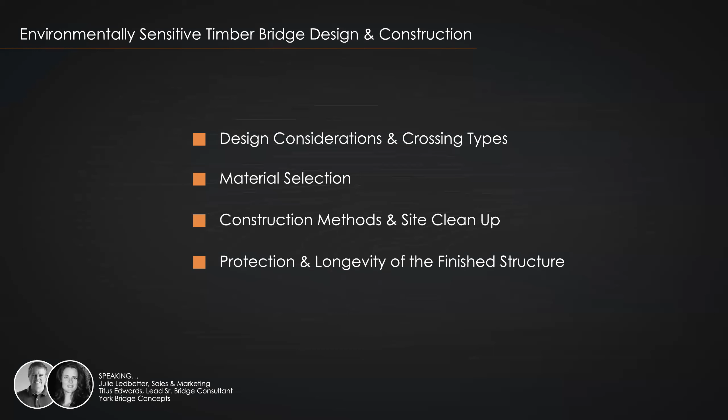Bad for the environment. Julie, these are 4 great points, and they will serve as an outline for our presentation today. And we're going to discuss how York Bridge is involved in all aspects of this from an environmentally friendly solution with our timber bridges.

Yeah, that's a great point, Titus. And of course, it all starts with choosing a span. Choosing a span is going to be, of course, number one, based on cost. You did a webinar already on spanning solutions, so that tends to be the number one concern. But then you have those special projects where a span needs to be considered based on the environmental concerns of the environment. Is that right?

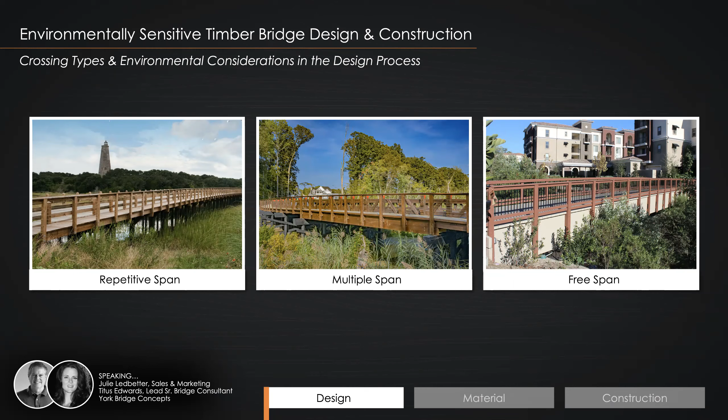Bald Head Island is a great project, Julie, and you can see on the right from the aerial that there is a wetland, a marsh area within the island. This is a small private island about 2 miles off the coast of North Carolina, just south of Wilmington, and it's a resort tourist residential type of place.

People take a ferry across, and you can see the marina where they come in. Once they're there, they don't really have cars, but there's a tram that'll take you to various spots around the island, and you can also rent golf carts. But they wanted a little better connectivity, so they called us to build them a bridge over their wetland area. Now you can see the bridge on the left, and what a beautiful bridge it is.

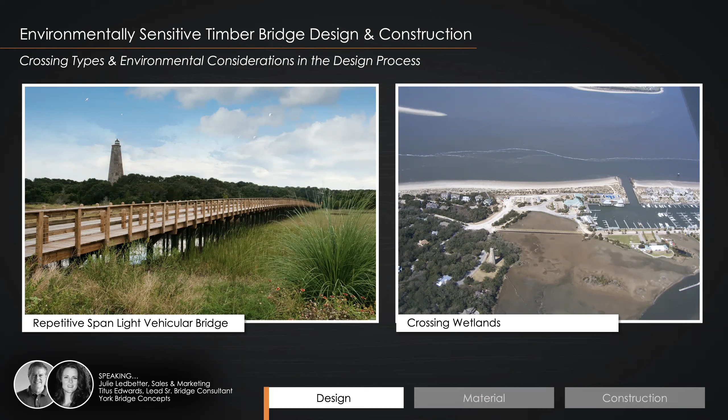Our second spanning design consideration when it comes to being environmentally friendly is our multiple span design, and our feature project here is Coastal Club. This is in Lewes, Delaware, and it's a subdivision that surrounds a 42-acre nature preserve. It's near the Atlantic Ocean, and it had 2 large areas of land that could be developed, but it was split by that 200-foot sensitive area.

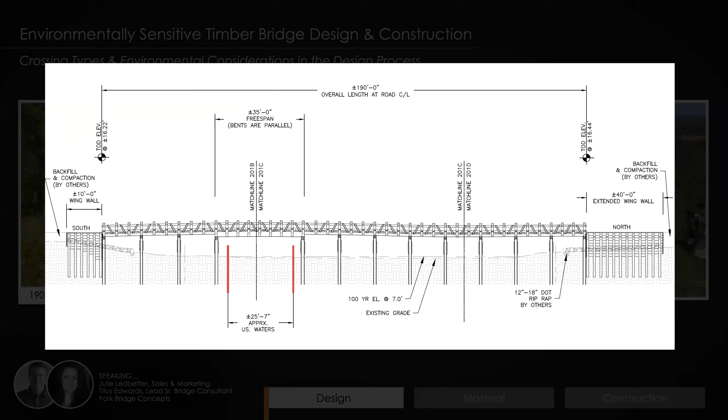There you see the waters, the main water channel there to the left, the red lines. You see the pile supported approaches coming and going on both sides. This is a great design, often used for many reasons, but it's very environmentally friendly to avoid any supports in the main water channel, and yet enables us to build a longer bridge.

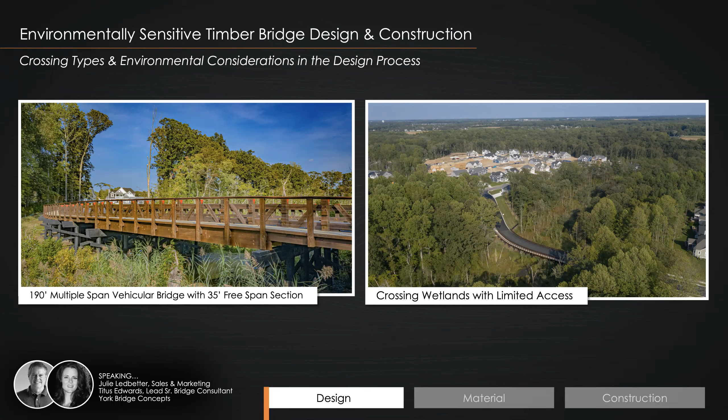So the bottom line is if you are working on certain crossing challenges and you know that you've got to meet permitting, or you have a special concept or design, or you really want to uphold certain principles in your projects, the custom design and on-site build that York Bridge can provide, we can accommodate those needs. And I think Coastal Club is a great example of that. We'll hear more about Coastal Club a little bit later, but let's move on to a free span design.

I think most of you are familiar with a free span design. Usually our clients, when they come to us, they say, I just need to span over this. So they're thinking one continuous span. This is Adagio on the Green, in Mission Viejo, California, a lovely little pedestrian bridge that crosses over the Oso Creek.

The issues with the Oso Creek with the local permitting agencies is they experienced a lot of pollution through the creek, and they were cleaning up the creek. So they made their local jurisdictions more difficult to add to. You couldn't add piling at all into the creek.

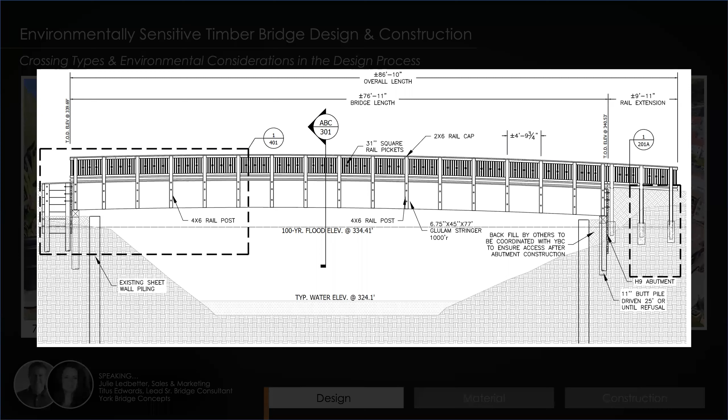Here's the drawing. I think we wanted to look and see, there's a 100-year flood elevation. We can see that the free span completely clears that flood elevation, and the Oso Creek flows underneath it. Very good. It's a beautiful pedestrian bridge. They love it out there, and it fits so well into that environment.

So I think, like I said at the very beginning, when we talk about being environmentally friendly, Timber Bridge Company, people naturally assume that we're just talking about the materials. Well, we are going to talk about the materials. The points we want to make about it is that, yes, it's a naturally and environmentally green material. It grows naturally, it's durable, it's sustainable, it's renewable. And if you have a special project where you need special FSC certified or LEED certification on your material, we can source that. That is an option. Like I said, that's an advantage to going with a custom design and build on site company.

You know, timber is very environmentally friendly. It is a green material. It is natural, it is organic. And most of the lumber that we're using is coming from tree farms that are being produced for the timber industry. And so it works out very, very well. It's a renewable, sustainable resource, much more environmentally friendly, with a much lower carbon footprint than the production of concrete and steel today. So timber works very, very well. It's a great material to build bridges out of.

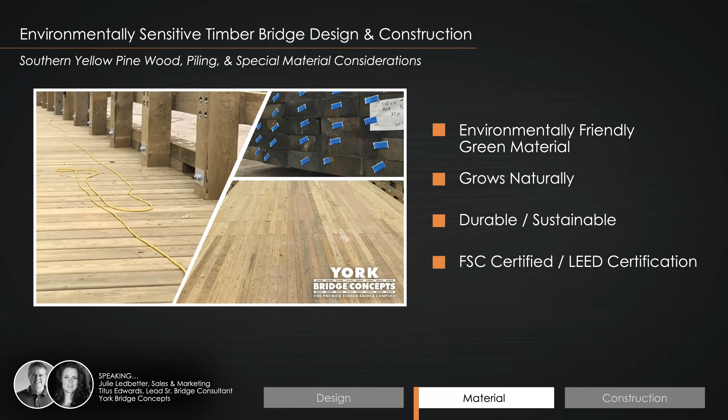If you just want to look and see the impact of concrete and steel, Google those two terms and put the word environment next to it and see what kind of articles you come up with. They're not good. Whole different animal, isn't it? Whole different animal. And we'd love to see a lot more timber wood construction in the future. It's a very big trend. Even outside of bridges, you see a lot more information about mass timber and the use of it in building buildings even.

So yeah, the main material we like to use is southern yellow pine. This is a picture of southern yellow pine going into the treatment.

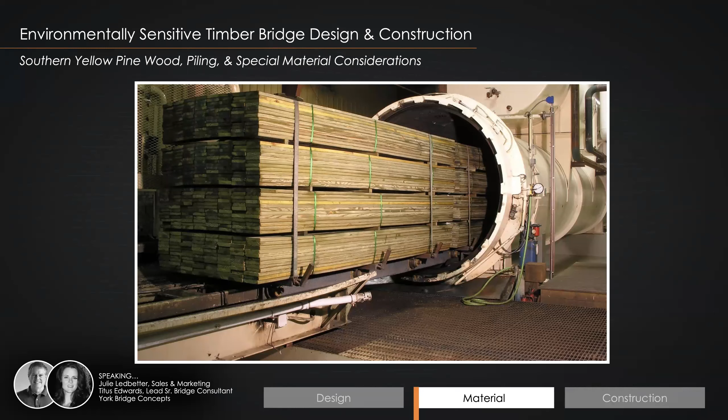If you take wood and put it outdoors, it's only going to last a limited amount of time. So you pressure treat lumber, and that's what you're seeing here. They're putting the raw lumber into these vacuum tubes and put preservatives into the wood. The idea is to prevent the wood from rotting outdoors and prevent bugs and termites from eating it. Pressure treatment is very important, and all of the lumber we utilize is pressure treated, except in a few cases, which we'll share with you in just a moment.

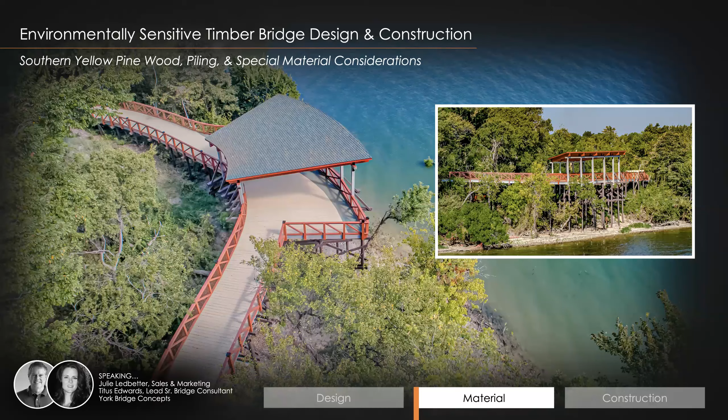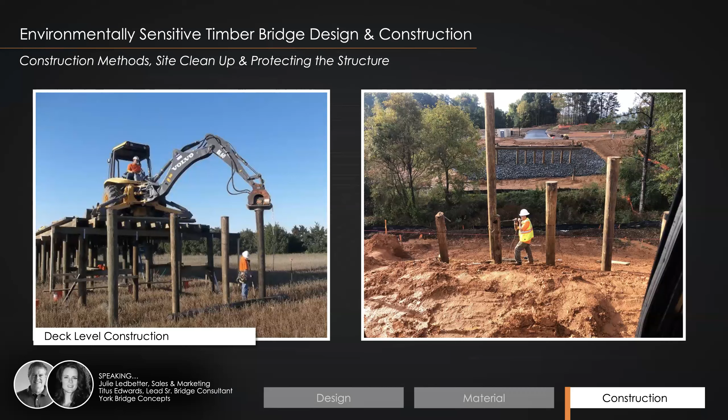Again, working with our excavator, with that vibratory hammer. And there's a stream that's being delineated by that silt fencing, and that's the protected area. And we're going to show you in just a moment, not only the materials, the design, but also the construction method, and very environmentally friendly. As a matter of fact, here it is.

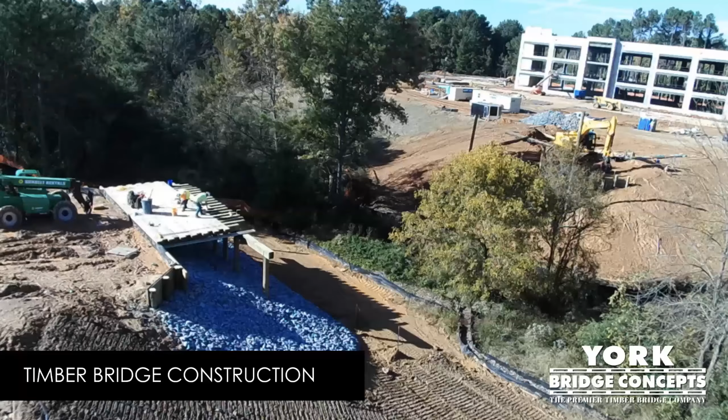And here is Edison Chastain in motion. Edison Chastain is an office building that's built in Marietta, Georgia. You can see it there on the right. And this is the entrance road coming up to the office building. We built a 2-lane vehicular bridge. It's 130 feet long, and it is a multiple span design. It has 3 15-foot approach spans.

You see them there on the left. On each side, there's some more on the right. But in the middle, there's a 40-foot long free span. And now you see them setting the glulam beams for that 40-foot free span. And I noticed, Titus, I did notice that nothing happened in the crossing. Everything went over the crossing with no problem.

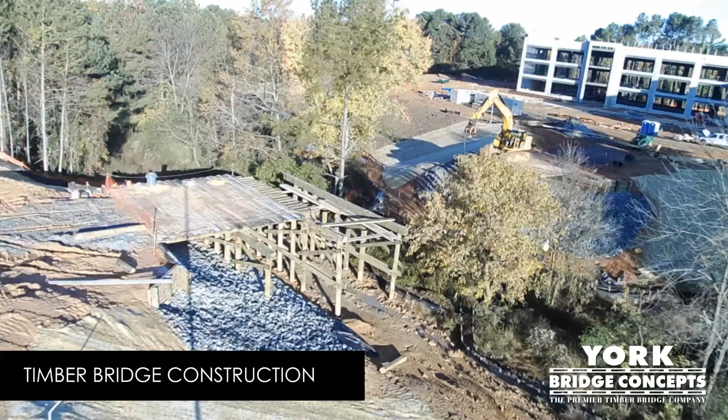Ta-da! Environmentally friendly construction method. We built from one side, working from the deck, went around, built from the other side, and then set those 40-foot glulam free spans, and we just spanned over the stream in the environmentally sensitive area. Deck level construction, design, the right materials, all of it went into play in this one bridge. And then look what you finish with.

Beautiful. What a gorgeous bridge, matches the aesthetics of the building. And we were honored to work with the developer on this project. And what a beautiful legacy design timber bridge, built in a very environmentally friendly way.

Yep. And as we get to the end of the presentation, we're going to talk more about protecting the structure. You can see here that we do have our acrylic polymer coating. And you can see that the timber piles themselves are coated, and that is to extend the life of the piling and the substructure so that that bridge will be in the ground for a very long time. And it provides an enhanced aesthetic as well, doesn't it?

Absolutely. So site cleanup, when we are on site, we do consider the environment. And we know that if you've ever been to a construction site, especially around here in the Wesley Chapel, Tampa Bay area, there's tons of construction everywhere. And sometimes from the road, I can drive and see that there's sometimes trash everywhere. There's sometimes shavings and all types of scrap materials laying around.

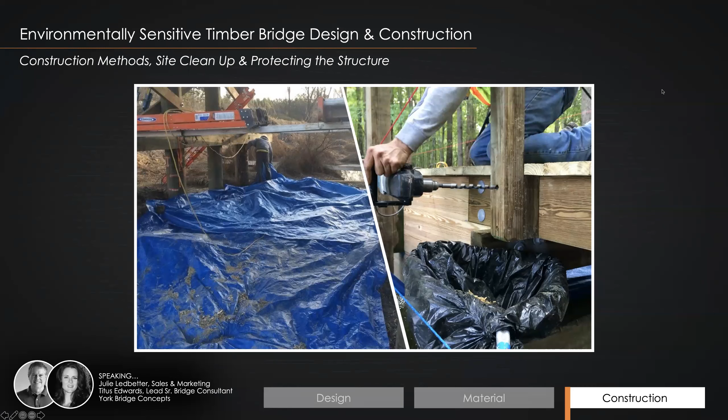It is amazing. And considering all of the shavings that go everywhere, the fact that we're able to catch them and dispose of them properly, and keeping that environment as clean as possible is quite amazing. It just shows the extents that York Bridge goes to. I don't know, there's other companies that do this type of thing, certainly not to the level that we do it. And this is why York Bridge is so special and so unique in so many ways. And this is just a couple of small things that we do to protect the environment, but that makes York Bridge so special all the way along.

Yes, when we do have to drill because of hard soil situations, we're also conscious of the spoils that are coming from that augering methodology. And you see here how we're actually capturing those into one of these large commercial garbage bags.

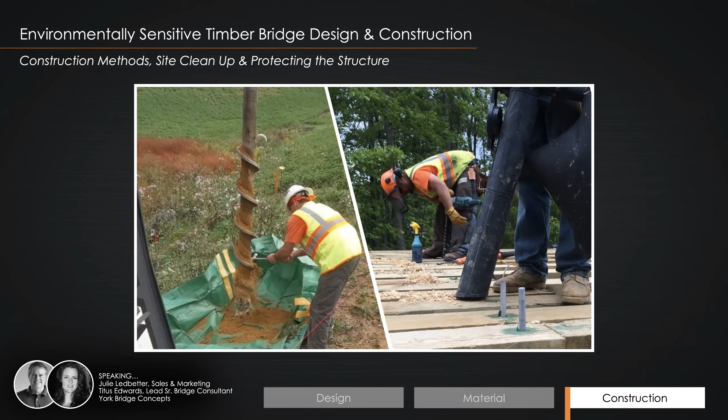Again, what a special and unique thing, because we don't want this sawdust and these cuttings to just go all into the environment. Again, many methods that we're utilizing to protect the environment: the design, the materials, the construction methodology, and some of the special things we do in building bridges.

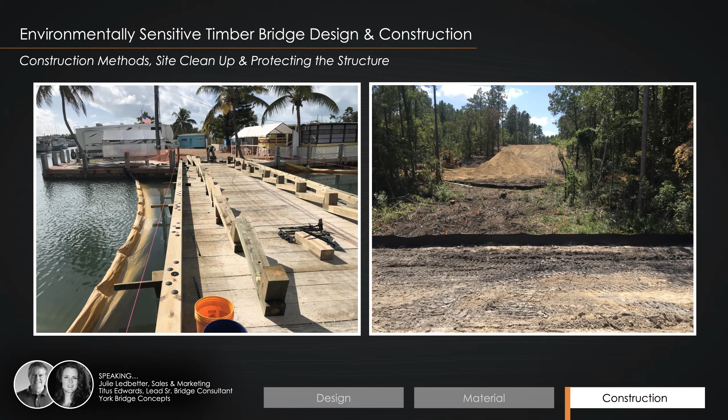Yeah, and then also the other consideration when we're on site, of course, it's standard to put up the silt fencing, but we just want to remind our audience that with timber bridge crossing, it is required. So we do put up the silt fencing, and we also use the turbidity floats when we do a water build. Turbidity curtains on the left there catch any of the debris and spoils that may get into the water, and then they can be cleaned up. And then, of course, silt fencing on the right from a ground standpoint. But in both scenarios, again, the environment is being protected in a permitting friendly way as well.

So back to Coastal Club. So we had a special situation at Coastal Club. Obviously, we talked about the multiple span. That is what we were spanning, that nice little section there. You can see the lovely pond underneath, the wetlands there. They went untouched. We did not put any materials into that area. But the situation was that we were unable to deliver materials to the other side of the bridge in order to start the repetitive span deck level construction. So what did our crew do, Titus?

Well, this is really special and unique, and it just goes to show again the tremendous talent. When you've got a company that has built so many bridges like we have, experts in the field know exactly how to accomplish any type of construction, no matter what the limitations may be. You know, Julie, I've had clients that call me and say, well, I got to get a helicopter and get materials in there because there's no access. Well, here's a perfect example of the creativity of York Bridge. And if we can replay this little video again, I want you to see what we're doing here.

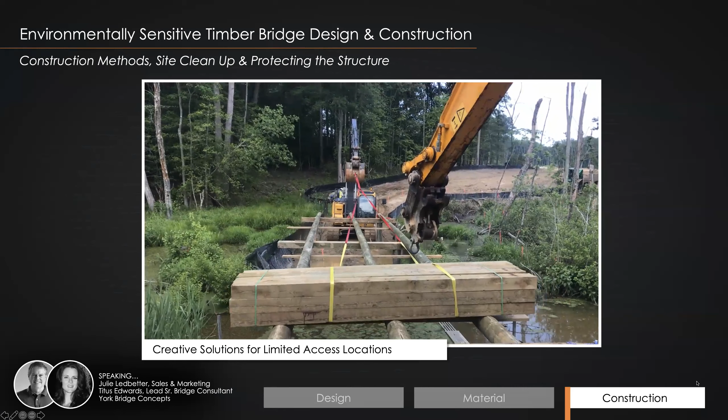Now, if you remember this Coastal Club Bridge, it's a multiple span. So there's a stream in there, and you've got a 35-foot free span. Well, we can't reach and build it all from the deck from one direction, but the access to the other side was very, very limited. So what do we do? We got two excavators, one on each side, and they have built this temporary crossing. You can see the piling. These are big 65-foot long piling, and they're taking the lumber and pulling it, sliding it across.

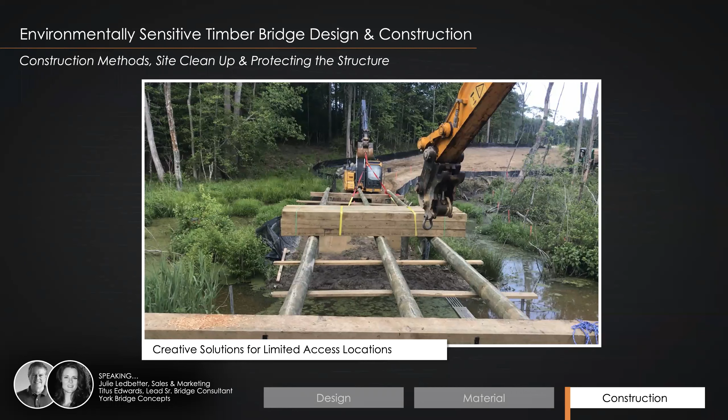You know, Julie, I have read some things about the Egyptians building the pyramids, and they may have used some similar type of technology in sliding some of those big stones. But again, you see the creativity that we're able to utilize. Sure. When you don't have trucks and you don't have the technology of today, I'm sure you had to get really creative back then. Yes, indeed. And we were able to complete this entire bridge in a very environmentally friendly way without destroying or messing up or impacting that wetland or stream.

Yep. So let's transition into a project review. We have a special project to show you. It is a single lane vehicular driveway bridge in Lake Tahoe, California. A situation where two neighbors were sharing access to their properties, and neighbor A decided that they wanted their own access. They no longer wanted to share with neighbor B. So what did they do? They called the best timber bridge company. I would say in the world, but I'm pretty biased. Well, you should be.

To cross over their stream. Julie, when you're talking California, you're talking about very, very sensitive environmental considerations. And when you're talking South Lake Tahoe, that's where this is. This is crossing the Angora Creek in South Lake Tahoe. When you're talking Tahoe, then you can kick it up another 10 notches. Environmental concerns all over the board.

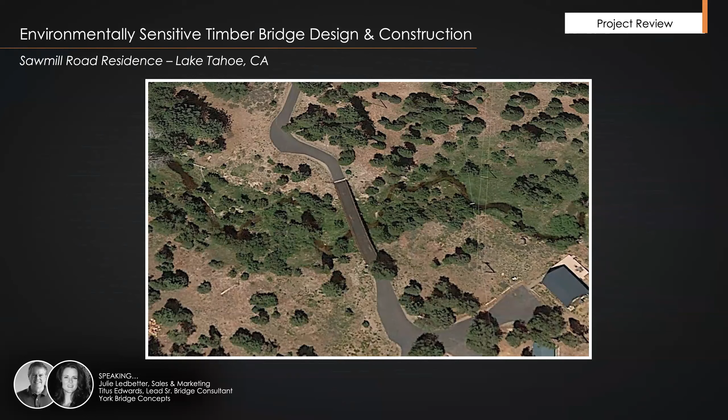And so the bridge is 104 foot long, but the design is two spans, a 58-foot span and a 46-foot span. You see in the middle, there's a pile bent to support the spans. This is an area that we were allowed to put in piling supports, but we stayed out of the area on the left and stayed out of the creek on the right. These were all hardwood, non-pressure treated piling that were used there in the middle.

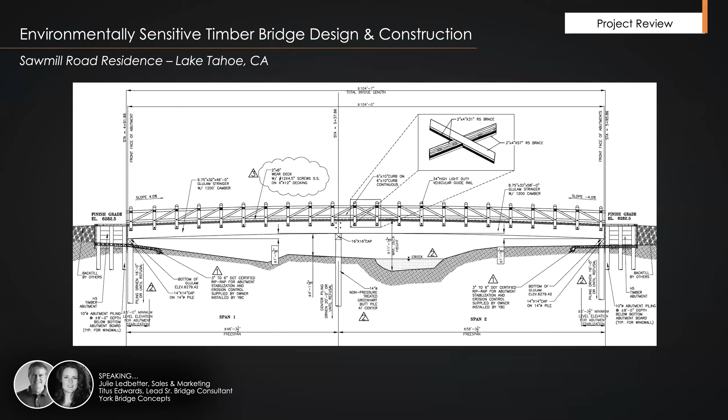So there was a lot of things going on here. The design had to be right. The materials had to be right. And when we ended up, it ended up to be a beautiful bridge. Here you can see it's actually setting the glue laminated beams, Julie.

Yeah. And I just want to point out, because I just love the way Douglas fir looks untreated. We can put protective coatings on Douglas fir, but Douglas fir glulam beams are just, to me, beautiful, untouched. They're beautiful. It's a great picture. It's a great testament to what we do, that multiple long span design, and how we carefully attach each stringer together, and staying out of that crossing.

That one pile bent in, and we were mobilized to just one area in order to complete the bridge. So there was limited mobility around the site. You see there on the left, Julie, there's a crane involved setting these beams. And of course, it's sitting way back in an area that it can drive into. You see our timber abutment, and then the riprap, the erosion control protection.

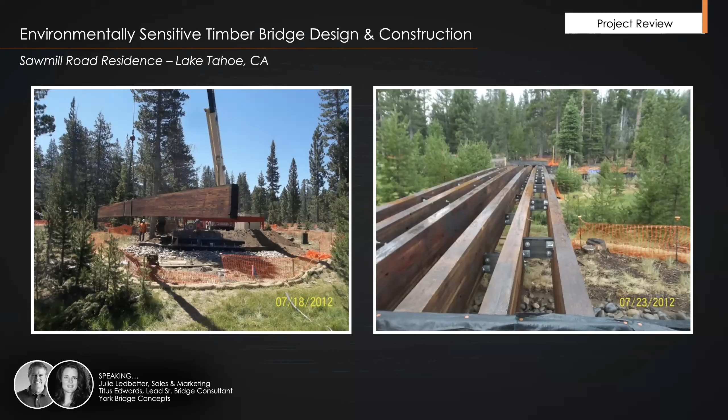Down there toward the bottom, you see what looks like hay bale type of things. And there's your sediment control. That's the protected area that we're staying out of. The picture on the right, in the very back of the bridge, you can see some of the silt fencing back there. So you see, again, all of these environmental protection measures are being used. And then we have a completed bridge.

And I noticed something interesting about the design of this bridge, Titus. And what was that? Well, it looks like normally when we have a curb, there's usually runoff to where when it rains, the water is able to run off the sides of the bridge. But here it looks like there's a continuous curb. Very good that you picked up on that.

Normally, you see the curbing down there, the left and the right side of the bridge on this vehicular bridge. You normally have curb blocks that are 18 inches long, and they sit the curbing up, and that means the water can run off the side of the bridge. That's normal in the design of a bridge with curbing. In this case, the permitting did not allow for water runoff from the edges of the bridge. So we removed the blocks and dropped the curbing down on the deck.

So now you have a channel, and you can see the camber, the arch of the bridge, so that the water runs back off the ends of the bridge, and you can see the drain system there, Julie, that then captures that water runoff. Mm-hmm. Yes, that's a very unique design. And it turned out to be a very beautiful bridge indeed.

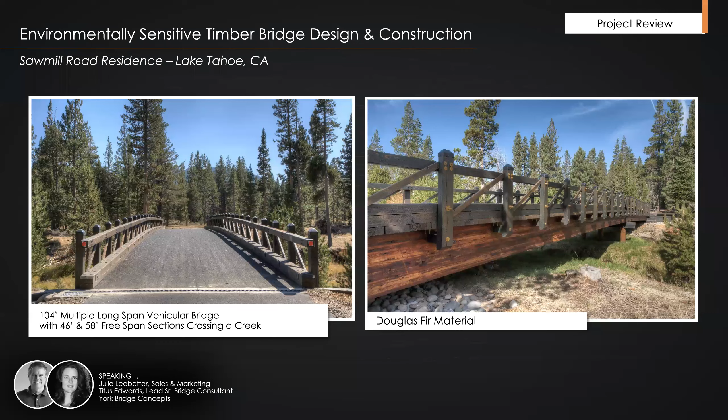Oh, it is. What a gorgeous bridge, protected, built environmentally friendly with not only the design, but the construction methods, the materials, everything. What a perfect example, case study of what we've been talking about today. And in conclusion, we've talked about it all. I've hinted at it all along that the final structure should be protected.

In addition to the CCA treatment of the timbers, we can add acrylic polymer coatings to the timber, any exposed substructure, the exposed stringers, and the railing as well, because most important is that we keep your bridge in service for a very long time. All of these finishes we use are no or low VOC, all EPA approved. Not only does it provide for lower overall maintenance, it increases the lifespan of these bridges so you can get a 75-year design life out of our vehicular bridges, and of course you get the enhanced aesthetics that go with it.

So when you put all of these together, we've talked about environmentally friendly methods of building bridges, materials, designs, all the special things we do. York Bridge is very much concerned about the environment, and we can certainly meet your needs along that line and build you a great legacy design timber bridge.

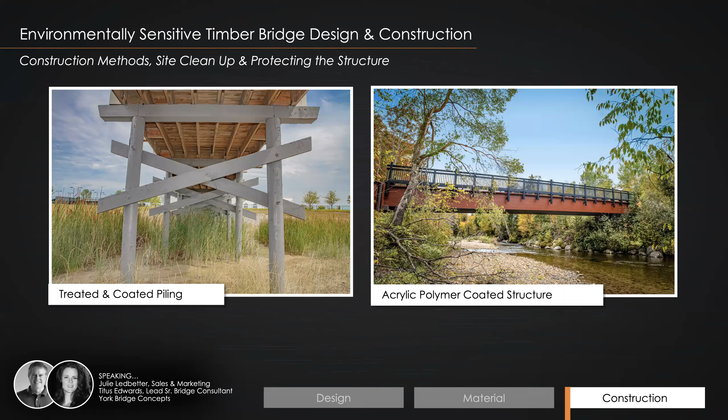I just wanted to point out to our audience one more time, one of the advantages of being a full design, build, timber bridge building company is that we have the flexibility and adaptability to tailor all aspects of your project to the special environmental needs of our clients. We'd be happy to work with you on any projects you may have and come up with some good solutions for you from an environmental standpoint.